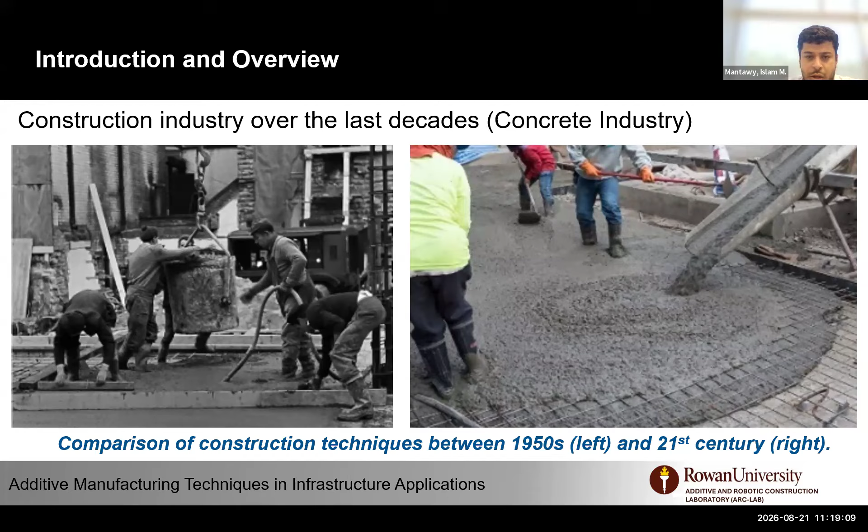We are almost 50-50 between steel and concrete at this stage. But in the future, if you are interested, we can schedule another presentation on the steel side of additive manufacturing for infrastructure.

So, background quickly here: if you check ISO ASTM 52900, you will find the classification of all additive manufacturing techniques regardless of materials. So you have sheet lamination, which is basically metal, material extrusion which is concrete, metal, or polymer, binder jetting which is also suitable for concrete, metal, and polymer, material jetting mainly for polymers, powder bed fusion suitable for both metal and polymers with different techniques. On the right side, you can see direct metal laser sintering and others.

Vat photopolymerization for polymers and directed energy deposition for metals. Our lab focuses on concrete extrusion and direct metal laser sintering, and we're exploring other techniques too.

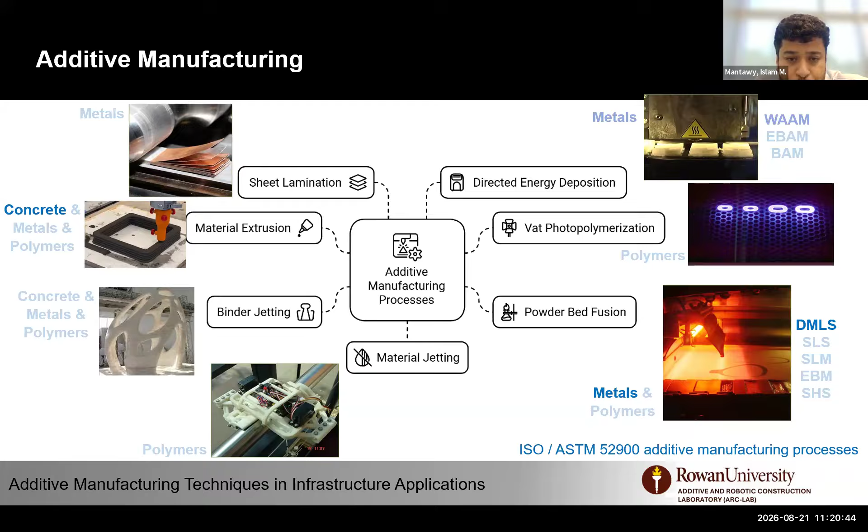The advantages of additive manufacturing in general are theoretically a reduction in labor needs, enhanced labor skill set, saving time, and reduction of material wastage through structural or topological optimization, broadened design creativity and problem solvability, potential reduction in carbon footprint, and on-demand manufacturing, which is a very interesting benefit.

For example, you could print on demand to replace a structural component instead of keeping them in stock, creating a more competitive economy and businesses.

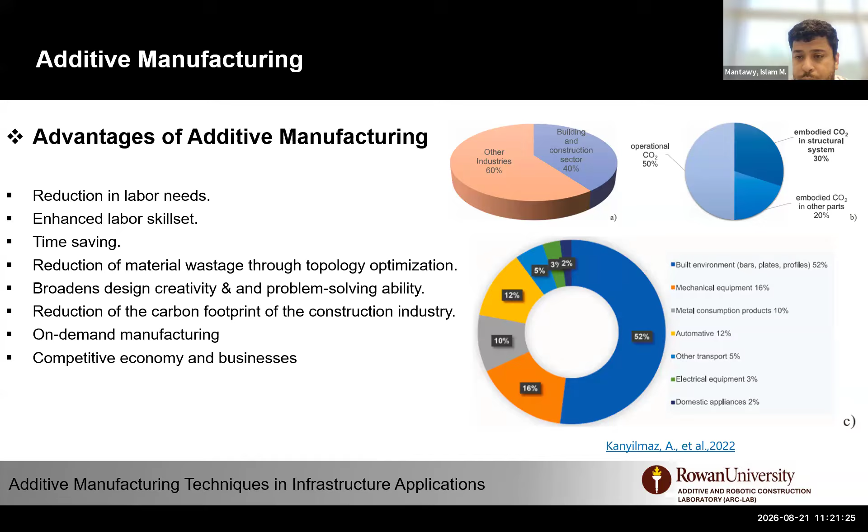At our lab, we categorize construction now into three categories. There's conventional construction, where we all know about forming, placing reinforcement, and casting. Most of the 3D printing techniques we see right now involve printing part of the structure, so printing formwork, waiting until curing, placing reinforcement, and casting. We call that hybrid construction because you're still casting.

Our goal at Rowan is to create an additive construction technique where the reinforcement is an integral part of the process, or to create a structure that is predominantly in compression with some redundancy.

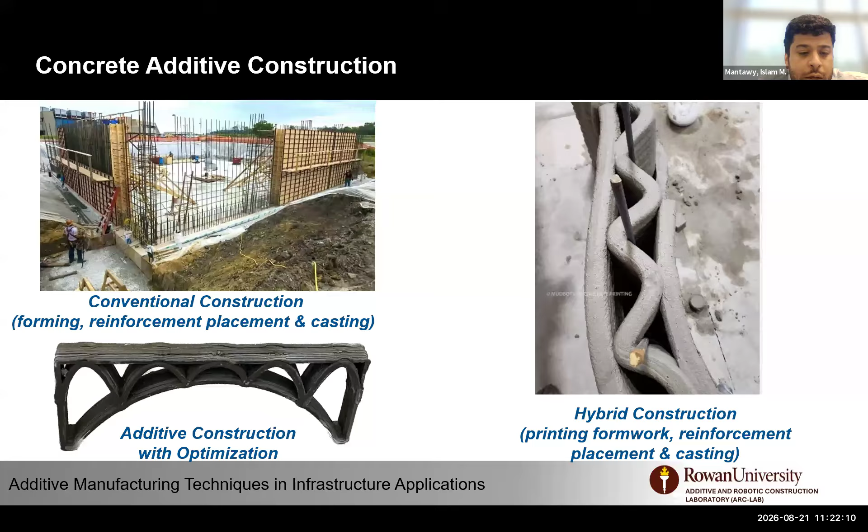Just to introduce concrete additive construction in general, historically concrete requires slump and vibration to fill formwork and encapsulate reinforcement. However, in concrete 3D printing, we actually change the material, and especially the rheology of the material is altered, so that allows us to print layer by layer. That actually induces challenges, especially in the material itself or the structure as a whole.

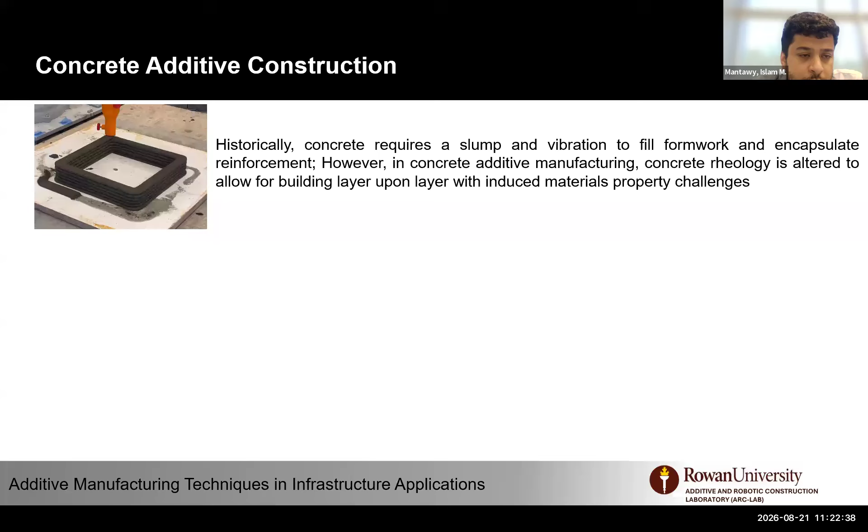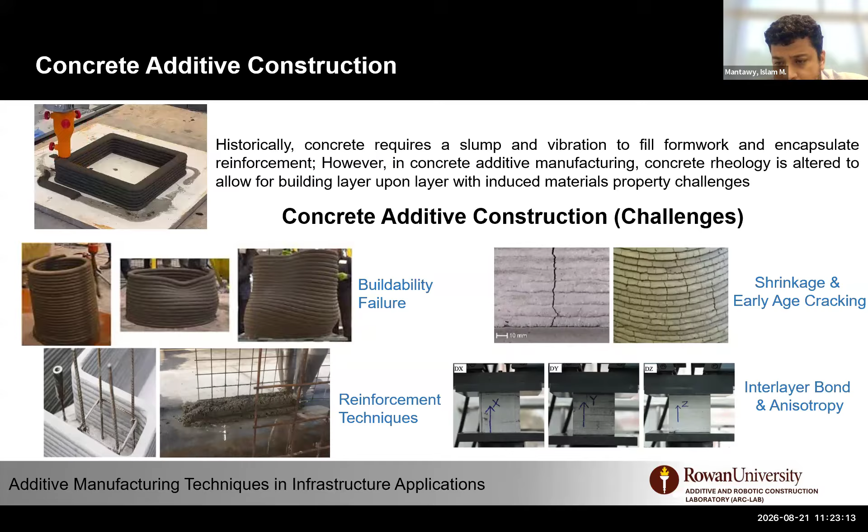Those challenges include during-print buildability failures because of not tuning the material rheology, or early age shrinkage and cracking, because instead of having cast concrete encapsulated in formwork, now the entire structure is exposed to the environment and elements. One big challenge is reinforcement techniques, or how to integrate reinforcement. And for sure, as with any 3D printing technique, you will have anisotropic behavior and interlayer bond problems.

So, introduction to our lab. Our lab has 5 students, 4 PhD students working in the lab. Mainly 4 of them work on concrete and 1 on steel. Our lab's objective spans concrete additive construction and metal additive manufacturing, both having optimization techniques and hazard systems.

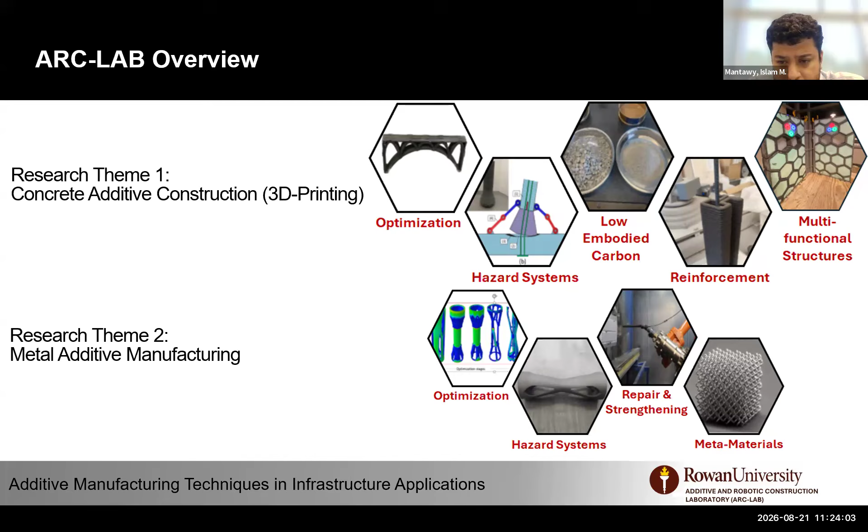In concrete, we talk about locally sourced material and low carbon footprint, novel reinforcement techniques, and also multi-hazard functional structures. In metal, we think a lot about how to repair corroded or cracked steels using cold spray repair, and also using hazard protective systems. As I mentioned, I will not touch on metal additive manufacturing in this presentation, just to have a focus.

After that, we do what we call performance-based printing. So basically, after we initially develop the material, we go through extensive testing through the printer with so many different parameters of printing, extrusion rate, buildability, printing speed, etc., to evaluate the printability of the mixes. After that, we end up with a hardened structure that we test for flexion, compression, and others.

We also collaborate with a faculty here, Dr. Trias, using LiDAR scanning to capture the geometry of the structure, during and after printing, to compare the as-printed result versus the CAD model. When we fail in any of those, we go back and adjust our binder.

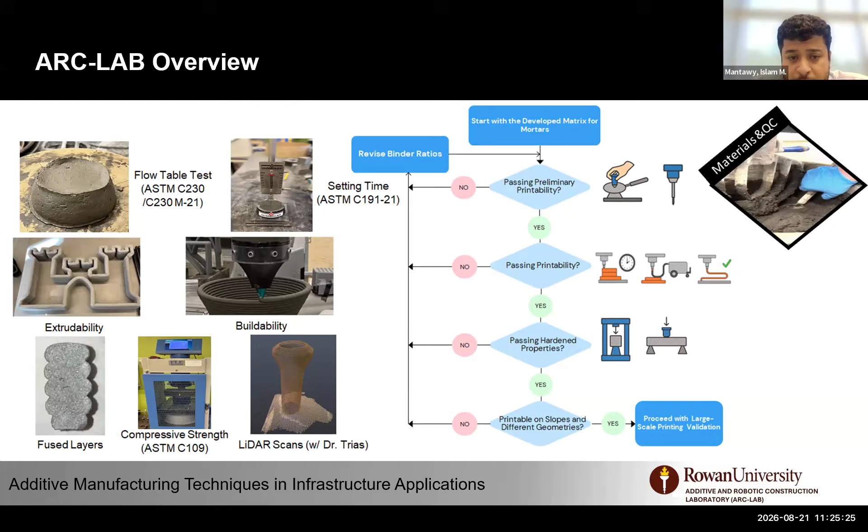But since 2023, we have different versions of those materials, so we are now in the phase of using those to build structures. Our lab at Rowan has the SCARA Elite Roadrunner, and this is a printer robotic system on a rail.

The rail is 20 feet long. The robotic arm has an extension of 7 feet, so it can print 7 feet around itself, and a height of 7 feet too. It can print 1 to 4 inches per second, and it has 360 degree rotation, so it can rotate around itself completely.

We have two systems: on the right side, what we call the closed system because it's a syringe tube, and on the left side, the open system from mixing to pumping to extrusion using the auger system that regulates the extrusion rates. We can print now from 5mm nozzles up to 2-inch nozzles.

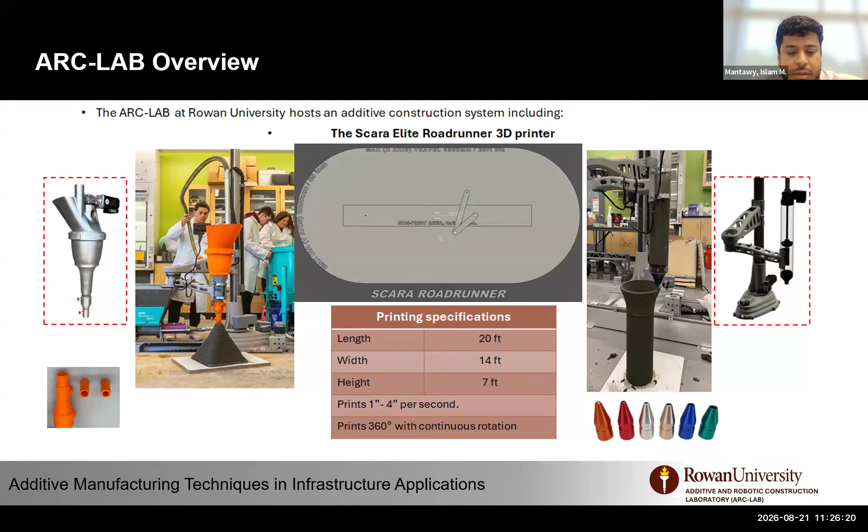Here is a comparison between the systems we have. On the left side, using the same material we developed at Rowan, with locally sourced material, 20 miles from the university, all the ingredients. You can see the same mix printed with 3 different systems.

One is a tube that involves more of a piston-type extrusion, the middle one is the auger system printing a much bigger cylinder, and the right side is printing out of the pumping system we have directly to the nozzle. You can also notice someone moving around with a LiDAR to scan the structure as we are building it, to capture the deformations.

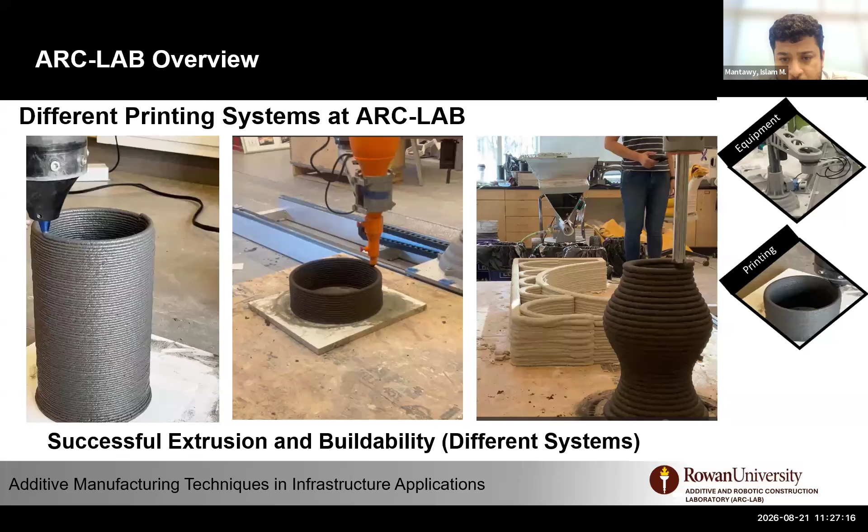So the same mix was used with 3 different systems and passed almost all the printability requirements. We also take great pride in the quality of our prints. Some of our mixes also include fibers, so we have fibrous mixes for 3D printed concrete.

Our mixes range without fiber around 10 KSI as cast. We're going to drop that a little bit once it's printed, dropped by 20%, so around 7 to 8 KSI without fiber. With fiber, you can increase 2 to 3 KSI, and it actually has benefit in the flexure capacities too.

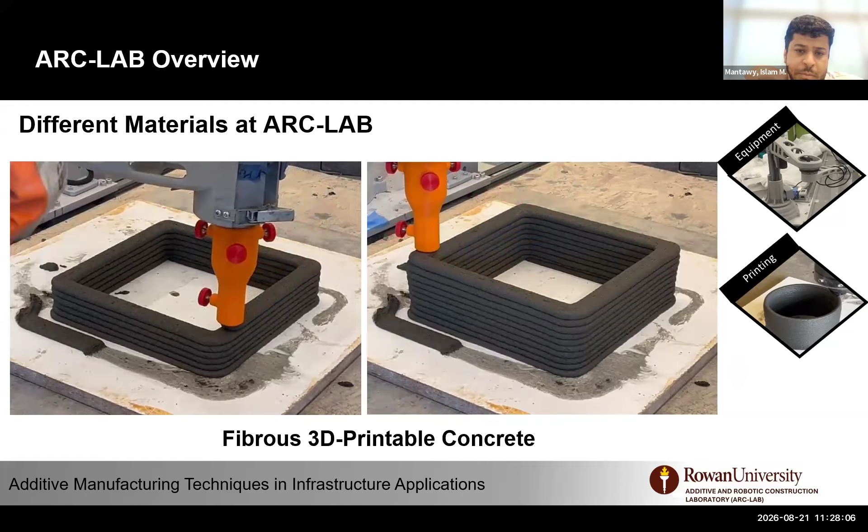So here is another type of mix that includes steel fibers. In this case, we are able to print fibers from 4.5mm, 6mm, and 12mm, 12.7mm, with the fiber actually as an integral part of the mix.

We also print on slopes. I just wanted to have a disclaimer here: we don't use any accelerant in our mixes, so all our mixes are fresh. If you hit the mix after printing, it will collapse.

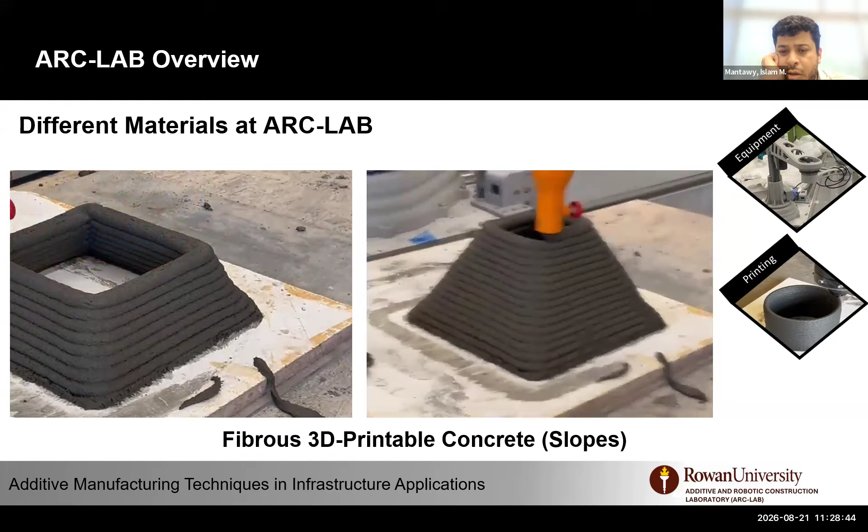So you can see here, we print this full pyramid without support using the fibrous mix we have, and also we printed without fibers. The idea here is, can we unleash the potential of 3D printing by printing on such slopes? This slope is 26 degrees from the vertical position, and we're able to complete the entire structure printed. We also took it one further step and printed a flare type structure, or flared pier. So with this same fibrous mix, we're able to print any slope.

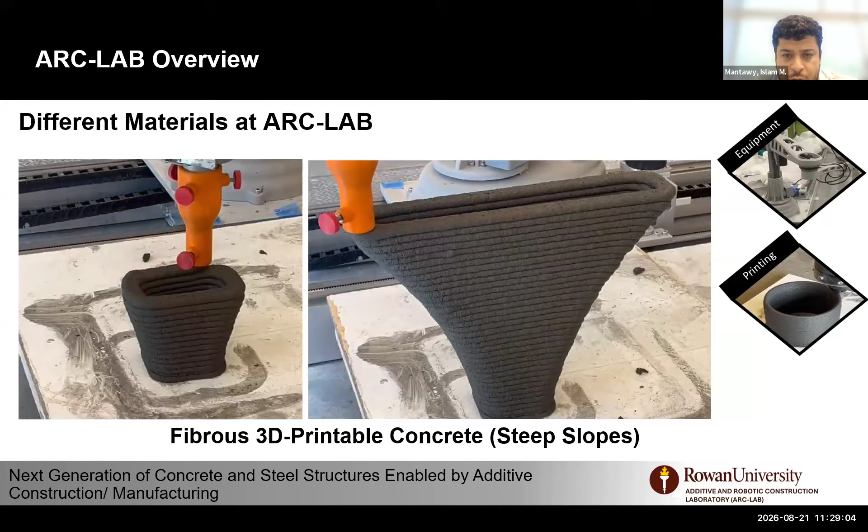We take that to what we call stress testing, so we print until failure on the slope. As I mentioned, this is without any accelerant in the mix, and it was failing here by geometry rather than by the material. As you can see, partial collapse on the left side of this pier, and this was around 65 degree slope from the vertical position.

We were able to identify that without fiber, we can achieve a 45 degree slope. With fiber, we can actually extend that to a 65 degree slope.

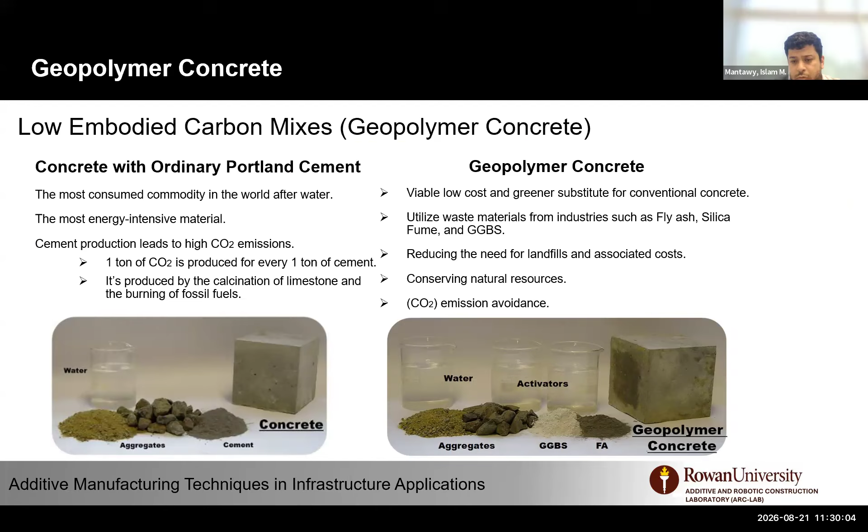We also work on geopolymer concrete. I'm pretty sure you're familiar with geopolymer concrete, that replaces cement with byproducts from different industries like fly ash, silica fume, slag, and uses chemical activators to create the binder. So we also work on that area, and it's a very challenging material. It's very flowable, but it has transient change in rheology, so we rely on those changes to start printing, and we're able to print different types. Later on, in project 3, I will show you we use that for 3D printing underwater.

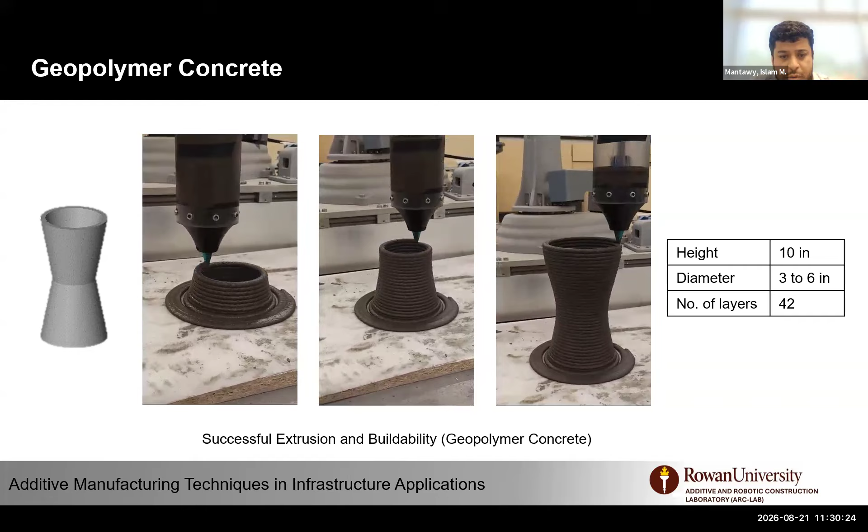So this is concluding the introduction of the lab. I'm going to start talking about the first project, which is how to use this material to develop a structural component.

Topology optimization is a way to optimize, a method to optimize using an algorithmic model, to basically subtract material where it's a low stress region and lay out material where it's needed, given a set of load conditions and constraints.

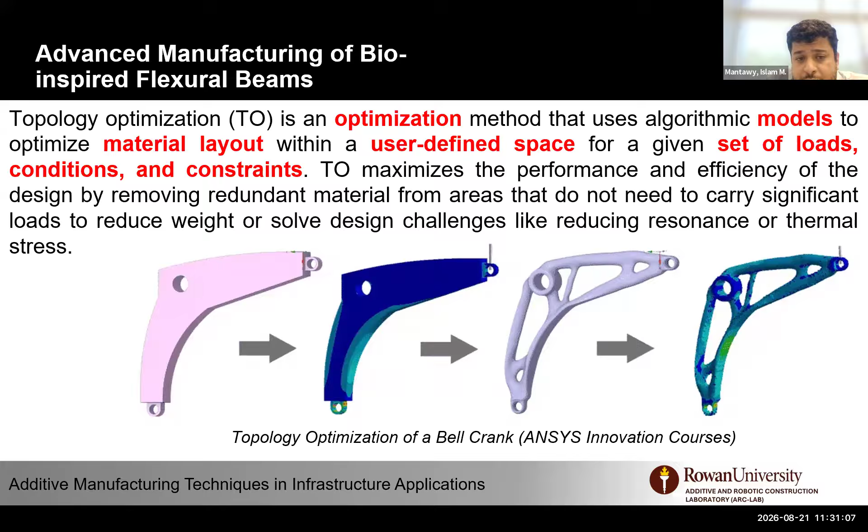It's very famous in homogeneous materials like steel. As you can see here, you can actually achieve the same performance as the right side from the left side by removing material from the low stress region. It has been investigated in both 3D printed and non-3D printed applications to create lighter structures. You can see on the bottom of the screen a 3D printed segmental post-tension bridge in Ghent, Belgium, where they 3D print those elements and connect them together and post-tension them. The analysis here involves topology optimization.

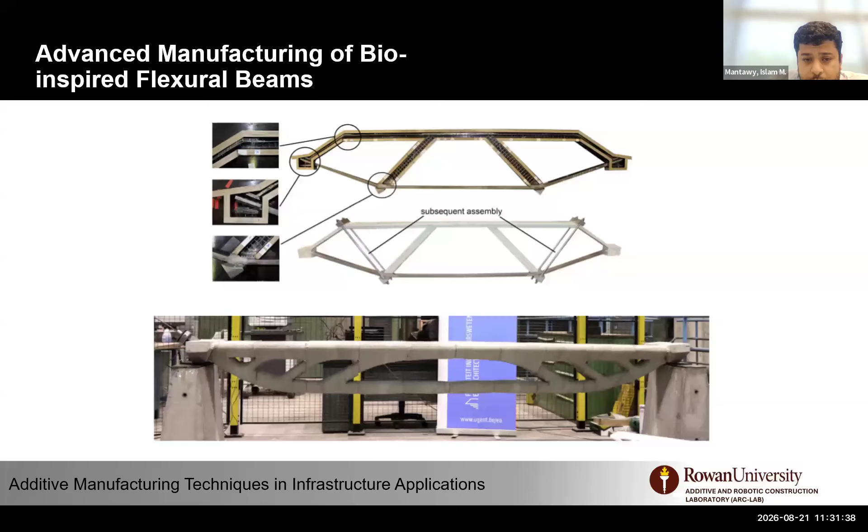So background here on general reinforcement for general casting of concrete. Usually the way we have reinforcement in our beams we cast is governed by the formwork. So basically we moved from bent bars to straight bars to make construction easier, instead of having the shear reinforcement in a direction where it's actually resisting the principal tension. We're actually using vertical stirrups, also governed by constructability.

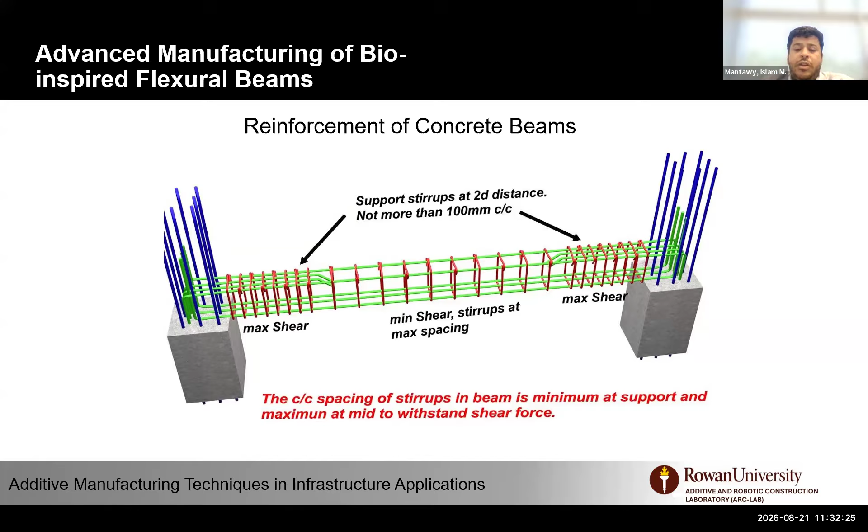So our goal here is, since our current technique is governed by the way of construction, which is formwork, can we step back a little bit and rethink the reinforcement technique for 3D printed structures? We came up with a concept really from nature, from how bees build their honeycombs. Basically, in a structural analysis of any beam, you will have tension trajectories and compression trajectory lines, and we come up with a hybrid technique where 3D printing of those cellular units or lattice structures, in the process, is able to include reinforcement. For example, here we use flexible cable reinforcement.

The idea here is that using the stress trajectory, we can fill the cells selectively using a flowable material. The difference between us and the rest is we immediately fill it with the same system, a 3D printing system, by changing the rheology of the material.

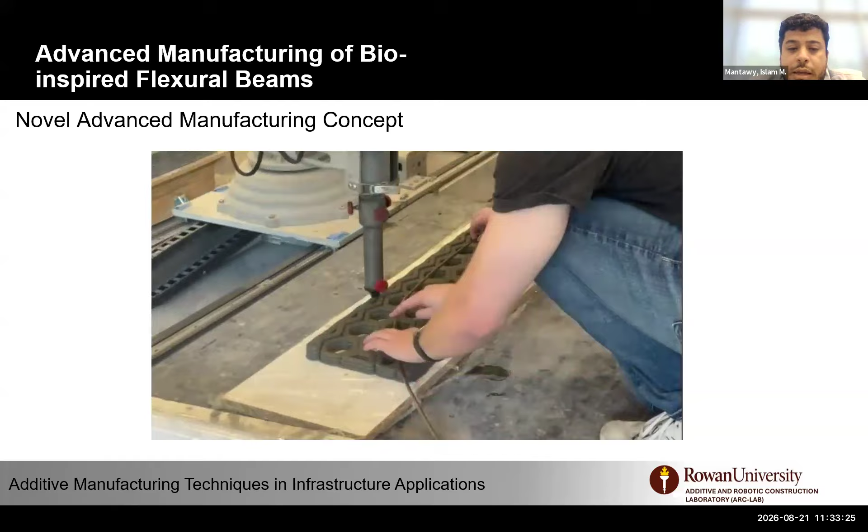This is just a schematic here. You can see we're printing a 3 feet long beam, and manually the student is placing the cable, tracing the tension line, and continuing the printing process. Right after printing, we change the rheology of the material to make it flowable and selectively fill as needed. We have to fill it around the reinforcement to protect from corrosion at the compression line and at shear areas.

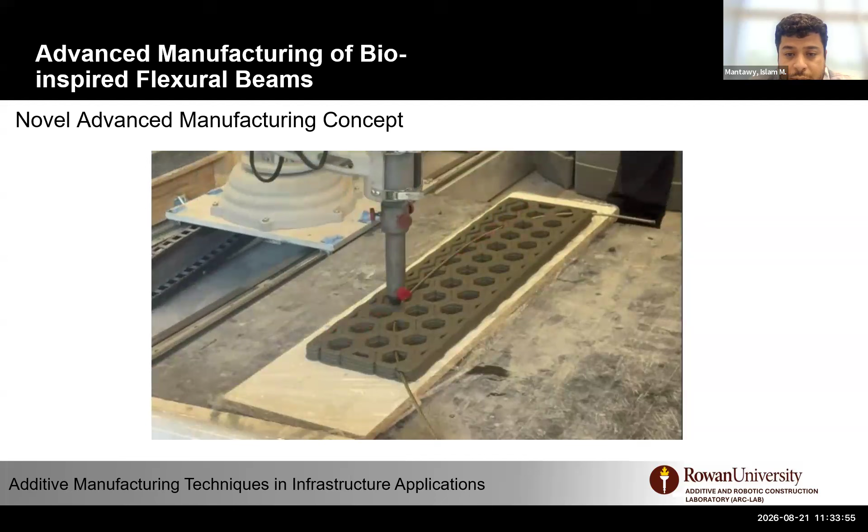In a larger, bigger beam, you get more benefit from this technology. However, in a smaller one, we may have just a few cells that are open, low stress regions. As you can see here, we start layer by layer and incorporate reinforcement, and until we finish, we can also use bent bar and straight bar. I'll explain that in a minute.

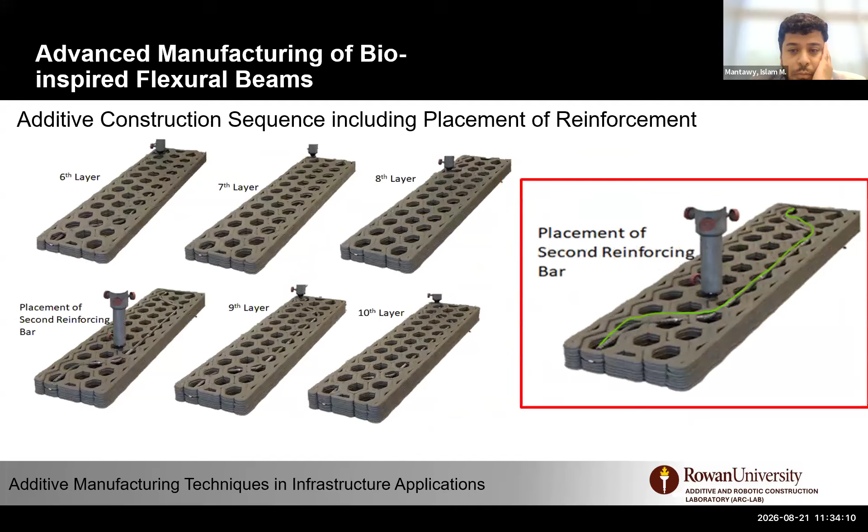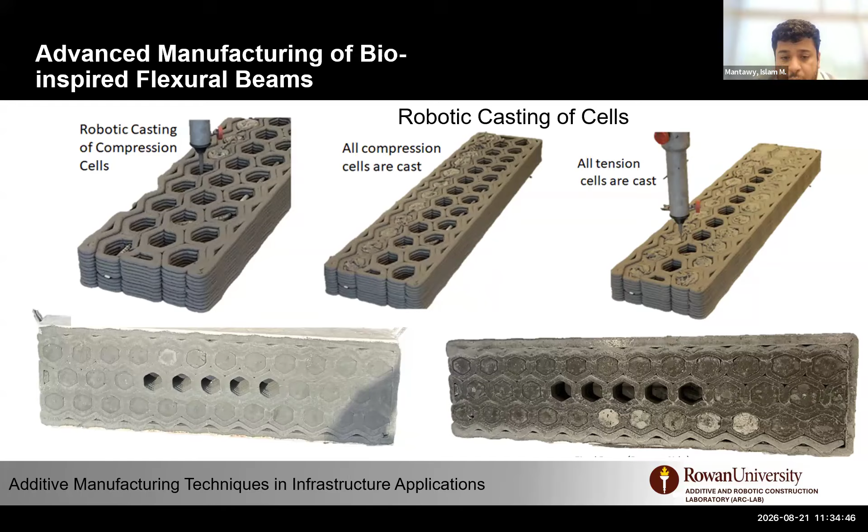The idea is to start filling those cavities immediately after finishing printing. The caveat here is that once we print and cast closer in time, we were surprised that they fuse really nicely, with no cold joints. I actually have one sample here with me that shows clearly the material fused nicely. For the 5 cells you can see here, just because of the geometry, we have limited benefit of optimization, but in larger elements you can see the benefits.

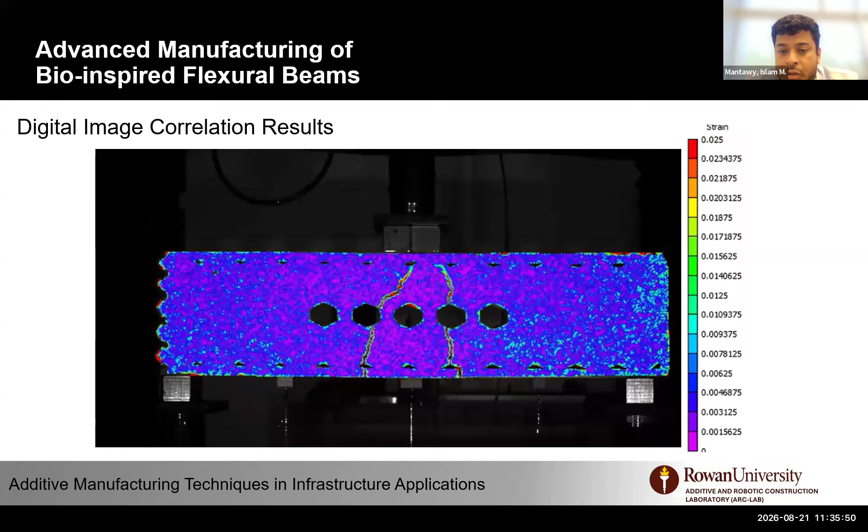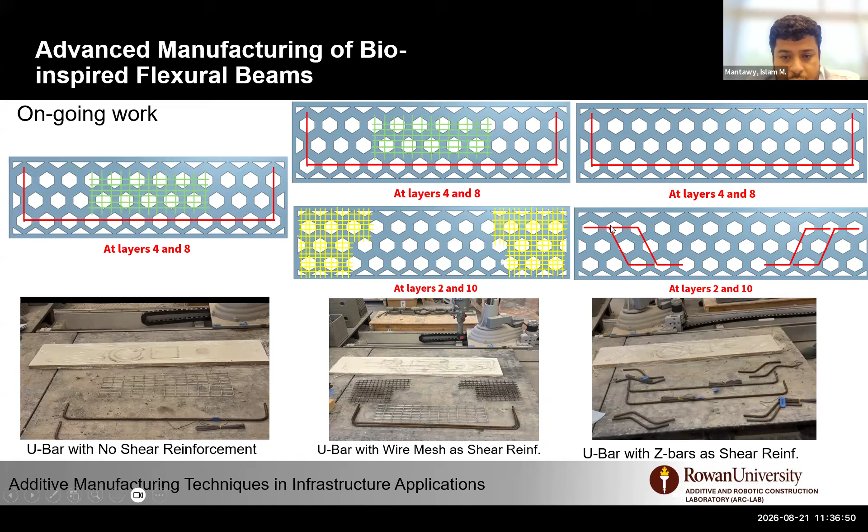So as you can see here, one beam without shear reinforcement on the left side, and two shear reinforcement strategies. Here is the process of the first beam, and right after printing and casting, on the left side, the shear capacity of this beam was around 13.5 kips, with a nice failure combining both shear and flexure. The middle one is dominantly shear, but it extends because of the load.

It was 3-point loading. The second one had shear reinforcement, which was able to suppress shear cracks using the welded wire mesh, and we shifted from shear failure to flexure cracks and flexure-shear cracks.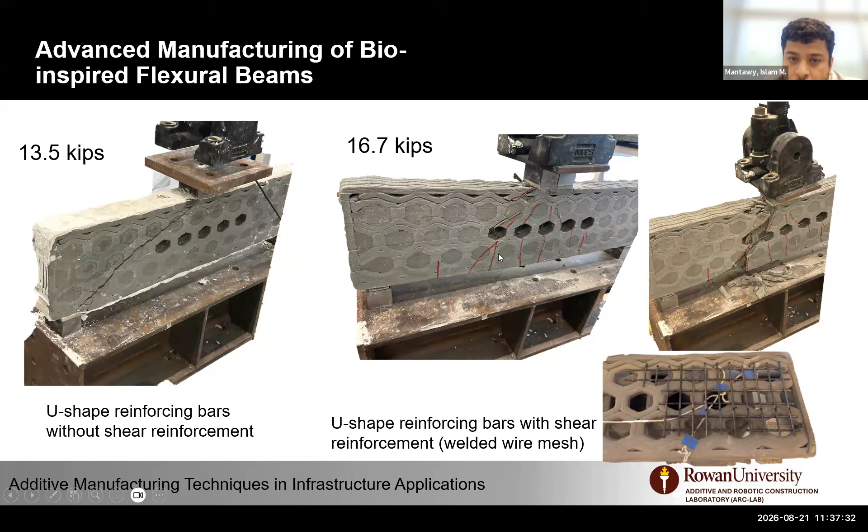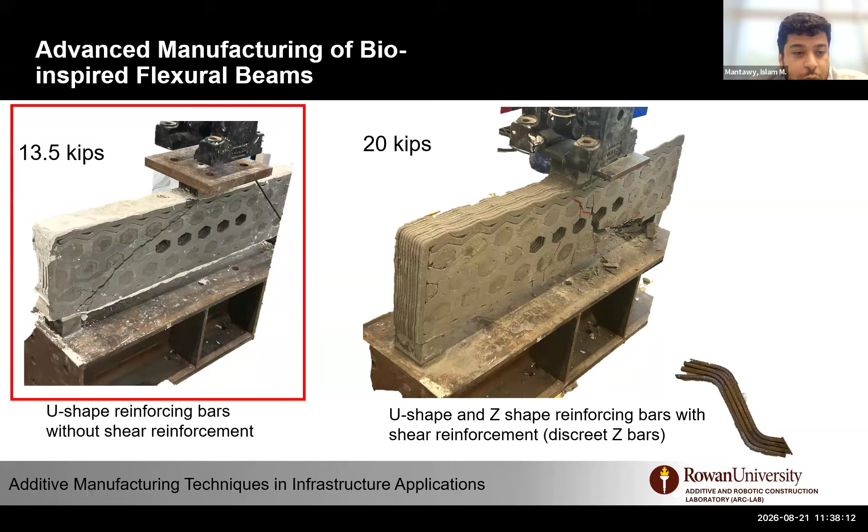And the last one is using the Z-bar, also has the same conclusion of reinforcing those ends from shear failure and shifting the failure toward the middle of the beam. A lot to be done to optimize and also make sure that those openings have some flexibility, rigidity, and ductility, so that we can reduce crack width as we move forward. But this is more of an approach that I tell my students - don't think conventionally when you do 3D printing. We will not be able to put stirrups in this case.

The second project here is related to another idea we have using this technology for seismic regions, developing bridge columns that can resist seismic loads.

So I'm pretty sure you're familiar with this resilience diagram. On the left side, you can see under a conventional element that suffers functionality loss and needs time for repair. However, new seismic systems always try to reduce functionality loss and downtime to enable functionality and rapid recovery.

As part of my PhD at the University of Nevada, Reno, I was part of a team from University of Washington and University of Nevada, Reno to test rocking columns for seismic zones. These boast a pretension column with a connection to the foundation using wet socket connection, and a cap using reduced section and hybrid bar type of connection with grouts, having pretension, unbonded, and energy dissipation through unbonded bars and the interfaces. The idea is simple: instead of making the beam or column rigid and inducing flexure behavior, what we're trying to do is allow it to rock back and forth.

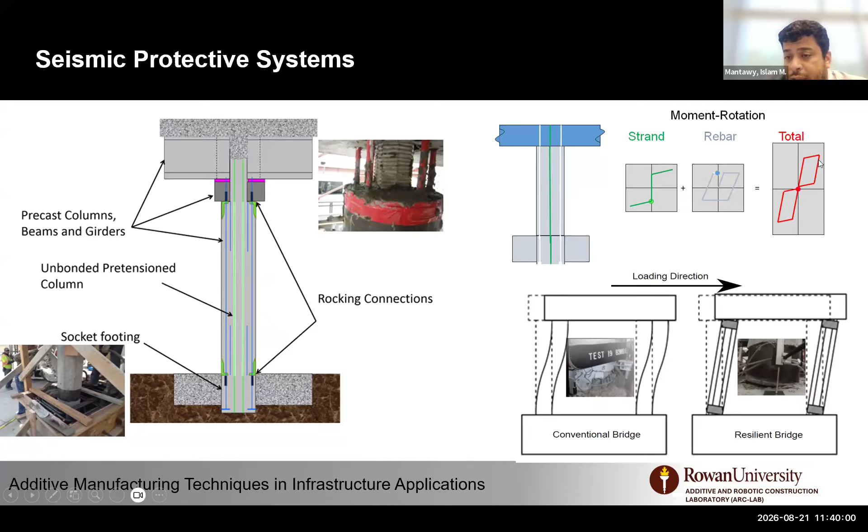And the pre-stressing will allow it to recenter. The confining tube at the end will confine concrete from spalling, and the rebar inside will actually yield and dissipate energy. So you can combine the moment-rotational response from strand and rebar and achieve this nice flag shape that dissipates energy and self-centers the column back.

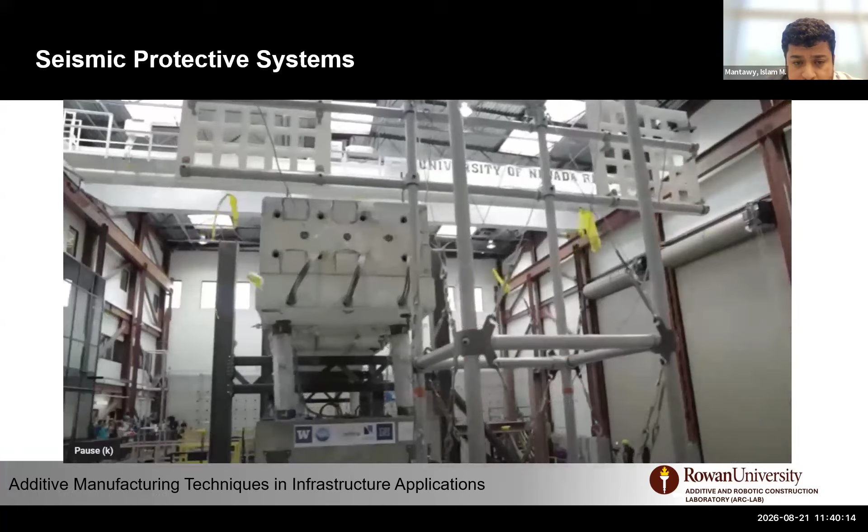So here's me, like 12 years ago, at University of Nevada, Reno, testing this in a large-scale test - 70 feet long bridge in the lab on 3 shake tables. And as you can see, a lot of deformation, sways. However, everything self-centered nicely to the original position without permanent collapse.

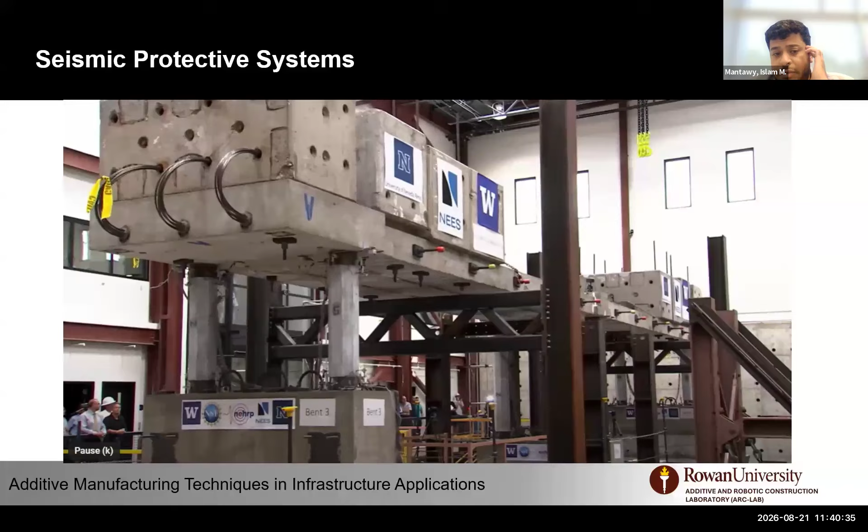A few challenges we have: after we finish the testing, everything looks nice, and the inspector will go there and see minimal damage, but the main damage was actually the fractured reinforcement that acts as the damper, like an energy dissipative device. So we did a lot of work to identify the damages, but most of the DOTs actually criticized the system, saying that we would have no way to repair those columns.

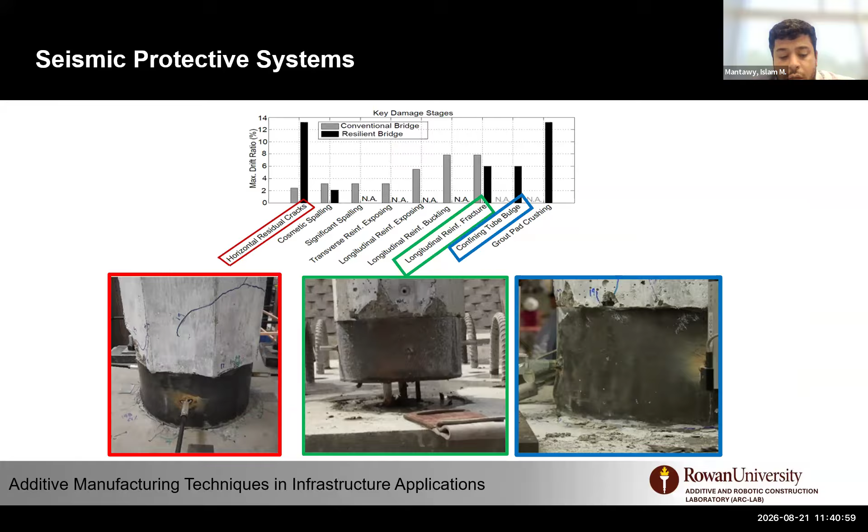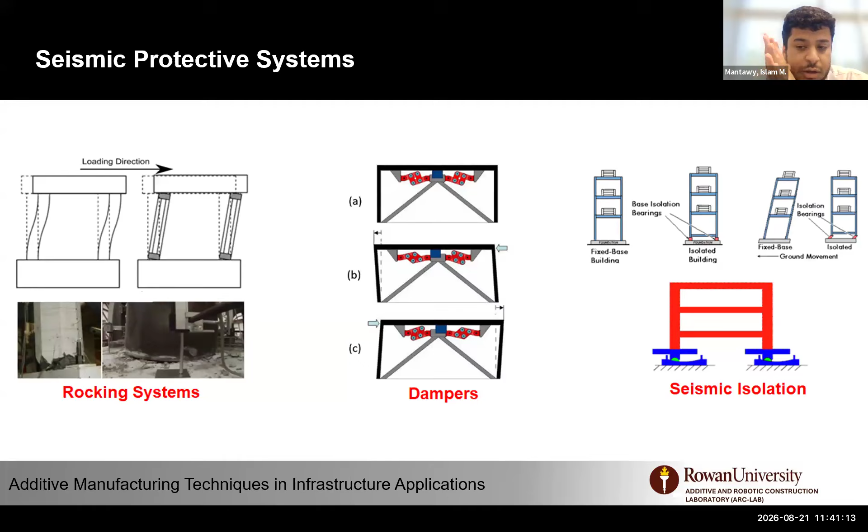So we thought about integrating other ideas when I joined Rowan, to enhance the system, integrating inspiration from dampers, seismic isolation using those concave shapes, and also from nature, where we have this ball-socket connection in our hip joints and shoulder joints having the cartilage.

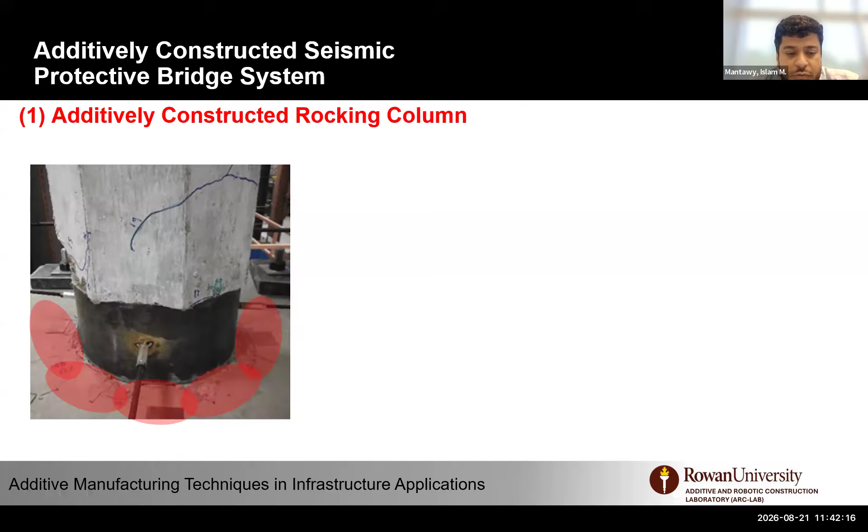So from the old system to the new system, you can see a lot of cracking and partial spalling in the foundation that is actually prohibited by code, because it has to remain elastic or damage-free. That is mainly because of concentration of the forces as it rocks, due to the cylindrical geometry.

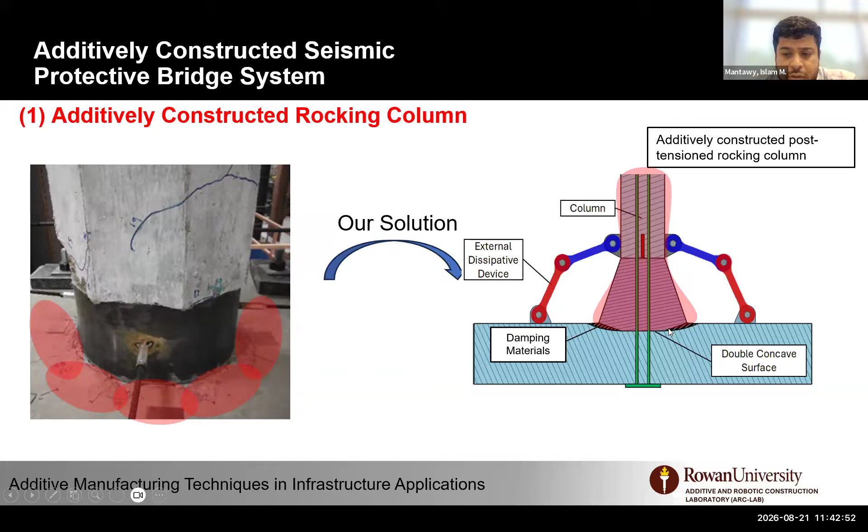So what we have schematically developed here is a column that has post-tension, will be 3D printed, and post-tensioned to the foundation, and has concave surfaces that allow us to put material that could act as a damper and also as an external damping system. That allows us, as it rocks, instead of having one concentration of force, to have a surface distribution of force.

So here, as you can see, as it rocks, it tips on one joint at one point. However, in our system, it would rather have a surface, and this material in between has to be a kind of shape memory material using TPUs and other materials that can damp the forces.

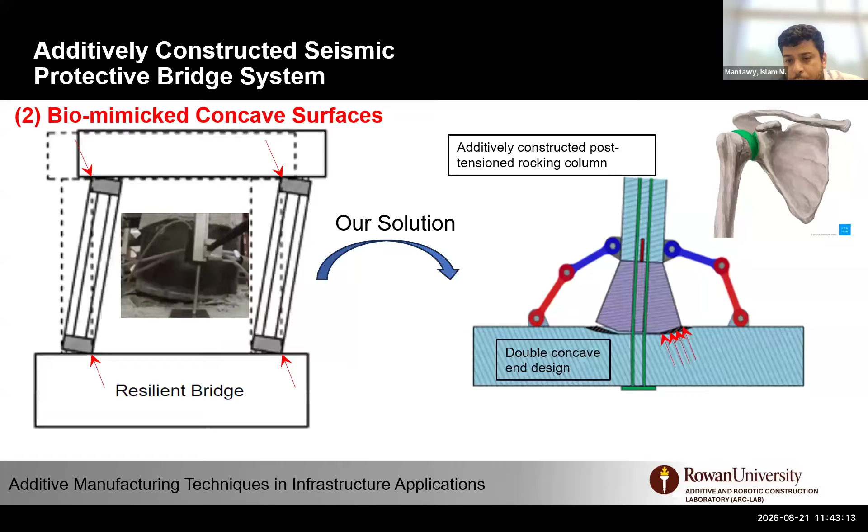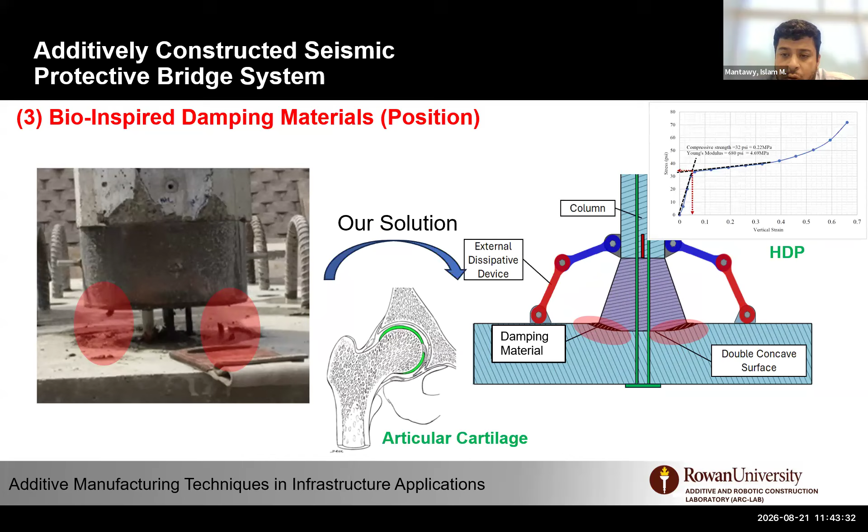The other one is having internal dissipation from rebar yielding. We move that to the material inside this cavity to allow it to deform and dissipate energy using either HDPE or TPUs and other materials, or an external element that activates by resisting rotational friction rather than yielding and dissipating or buckling.

We did that testing on the small-scale device, and we demonstrated at Lehigh University that we are able to dissipate energy using rotational friction as external elements. So this is what we call the integrated system that we propose.

As of now, we can also take out the external element and tune those cavities and material to damp the desired material. By doing so, we also shifted the system to be seismic isolated, because we're reducing the demand by getting a bit more flexible. So the acceleration will drop, and therefore the demand will be lesser.

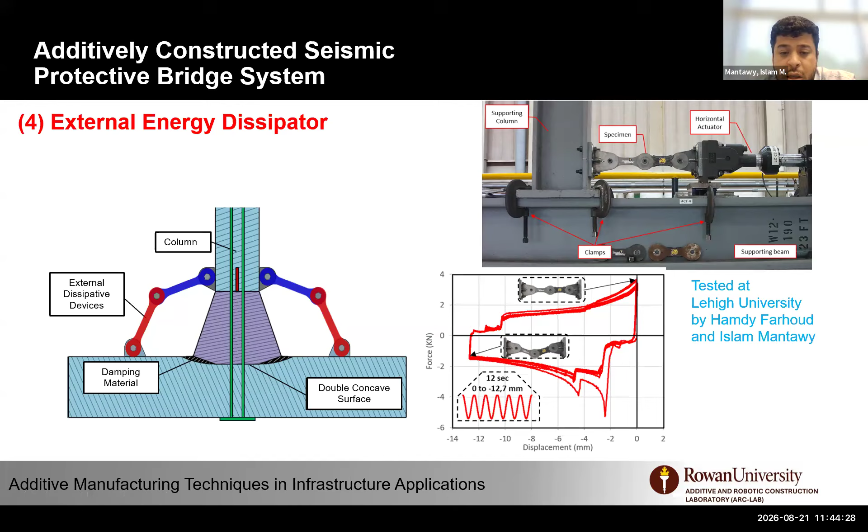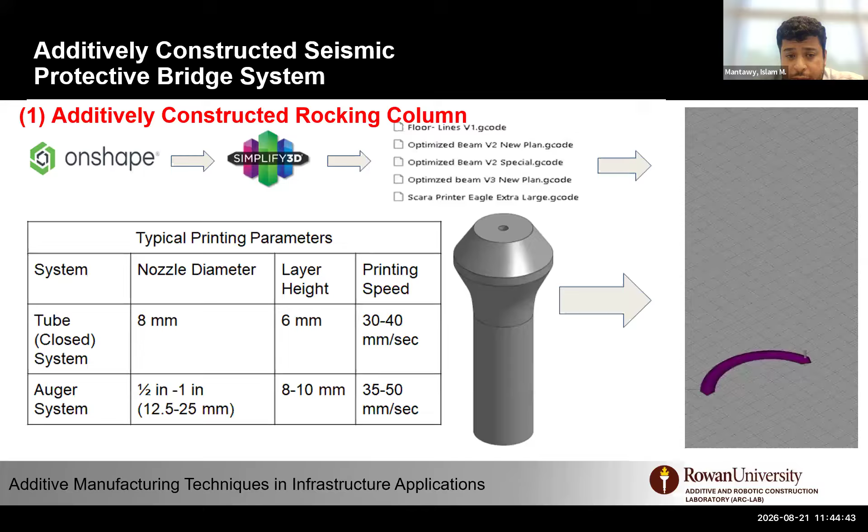We are in a phase of testing this idea at Lehigh University in the fall. We did all the printing requirements, and we are now in the final stage of construction of those columns. So basically, going back to 3D printing, students worked on very different designs.

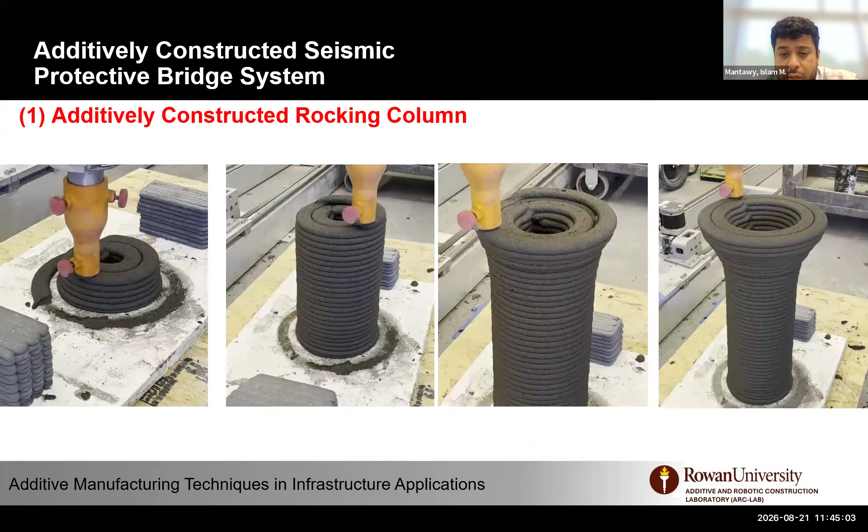As you can see here, the printing of one of the columns leverages our material's ability to create complex shapes, flaring in and out, with high quality and good adhesion between the layers. This is the end of the socket print. As you can see here, we have an opening in the middle for post-tensioning.

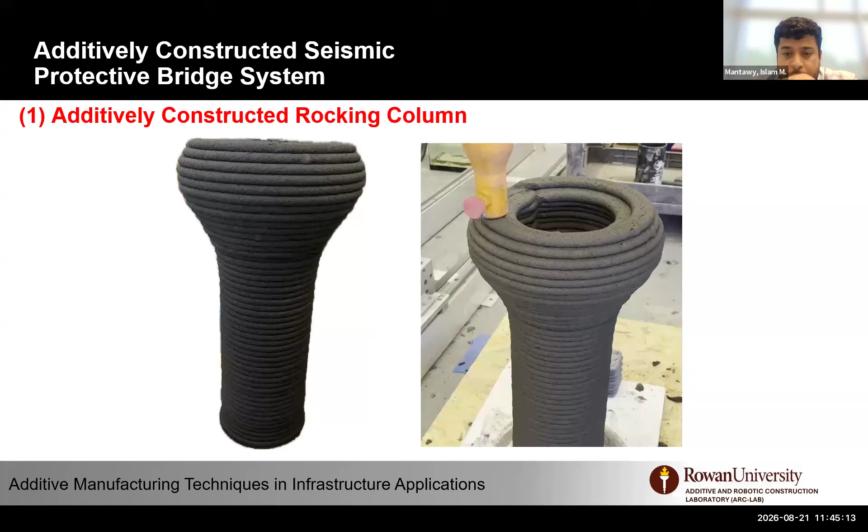For this column, we don't have reinforcement, but the idea, as I mentioned, is that as you isolate the structure, you have lesser demand. So really, we can test the material shear strength and rely on that to resist. However, I'm going to correct that in a minute.

The question would be: no reinforcement, no one would accept it. So go back to the column - the way we reinforce our bridge columns or general concrete columns is by having longitudinal bars and spirals. Or in post-tensioning, you will see a cavity or duct to do the post-tensioning or pre-tensioning.

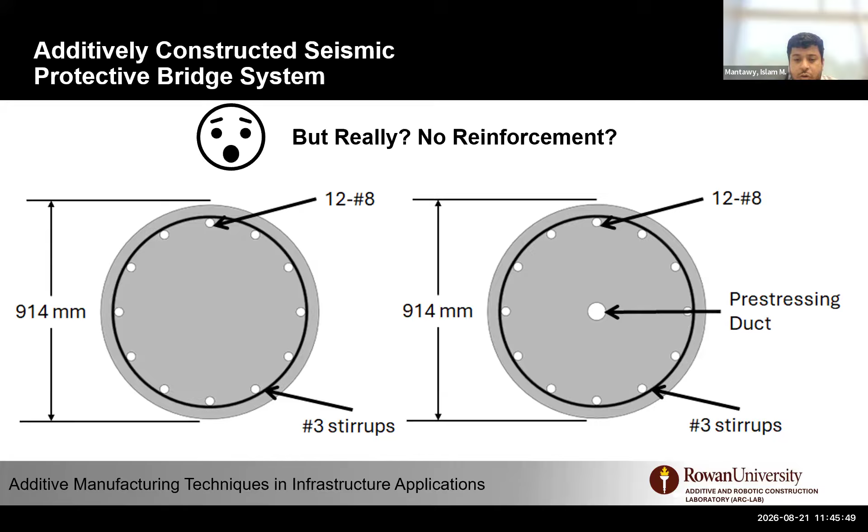So our goal here is to print the majority of the column, leaving channels or cavities for rebar to be bonded, leaving an opening for post-tensioning, and for the spiral, we actually try to use an external confinement technique.

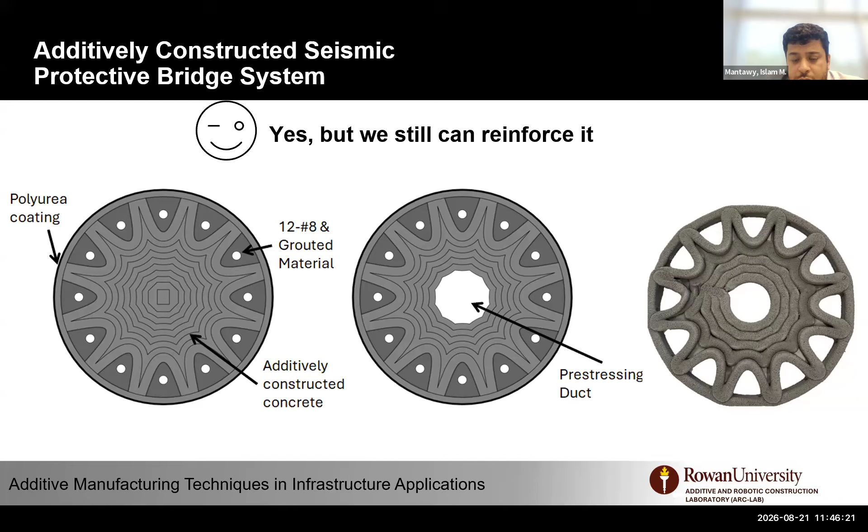I know Dr. Nani is well known for FRP and other work, so there can also be an option to wrap those columns with FRP. So the idea here is to print the majority of the column. Our column is just 6-inch diameter, so we iterate on the printing process and print the columns.

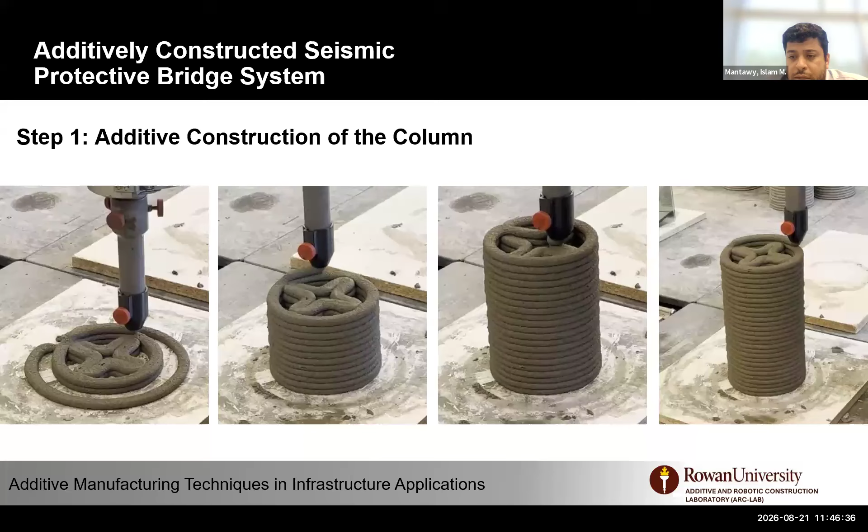We did stub columns to test the capacity of those columns. We also did integration of rebar and robotic casting of those cavities, and we used the polyurea material for confinement, which is good for impact, and also gives us a benefit for confinement as an external coating.

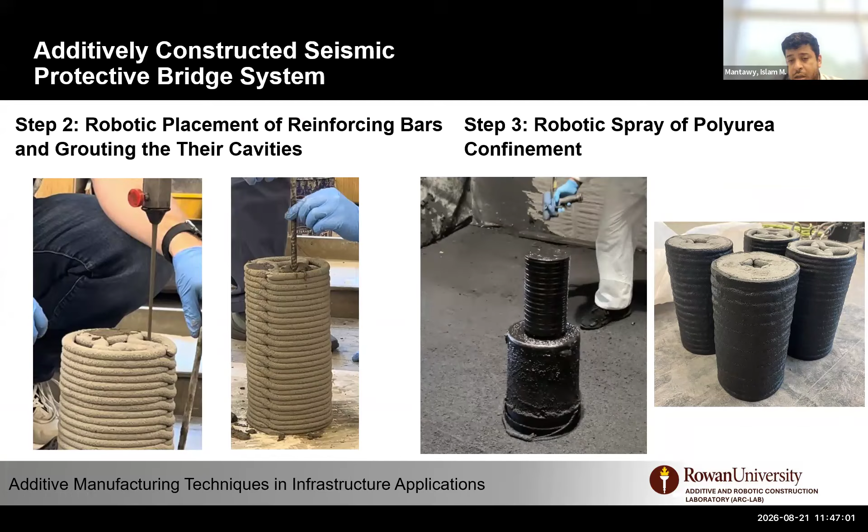So you can see here we have 4 columns. One we tested where we have only printed shell, printed and grouted, and rebar printed with spray overall. We tested all those columns at Lehigh University last winter, and we're able to see the mode of failure for each of them.

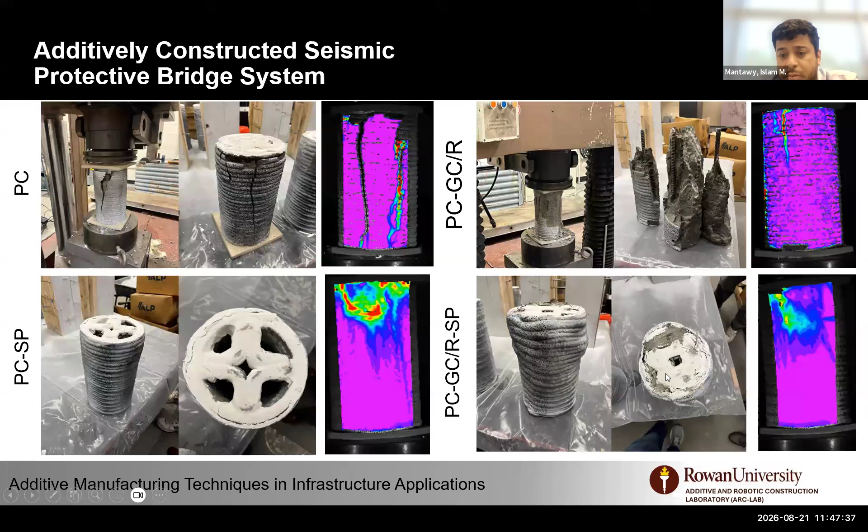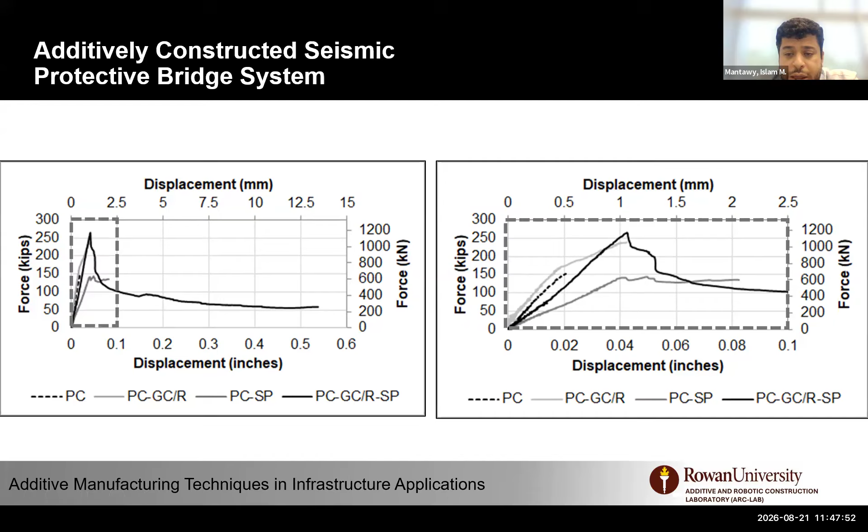As expected, the 3D printed alone had brittle failure, similarly to the reinforced one because it doesn't have confinement, while the ones with confinement were able to undergo post-peak ductility. Here are the results for those 4 different columns - you can see we increased the capacity as we add those components, either spray or the reinforcement, but also we get post-peak ductility.

The other project here, before we conclude the presentation, is related to underwater 3D printing. This was motivated before the DARPA project announced in 2024. We were actually doing work in this area, but the idea was how can we use water or other liquid to achieve more slopes as we print. However, now it has shifted to be a structural element.

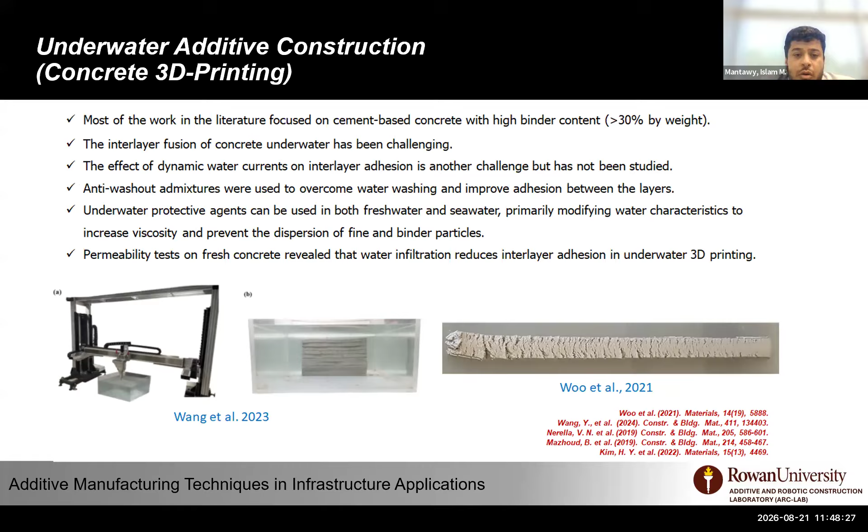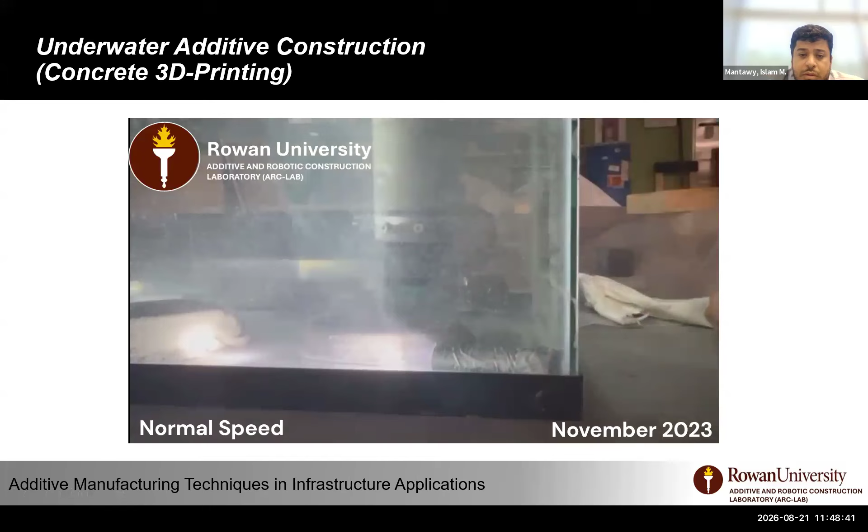So we did the first-ever underwater print in November or fall 2023. We printed our material underwater and out of water. I don't want to spend time here, but you can see clearly the washout of the material as we printed it.

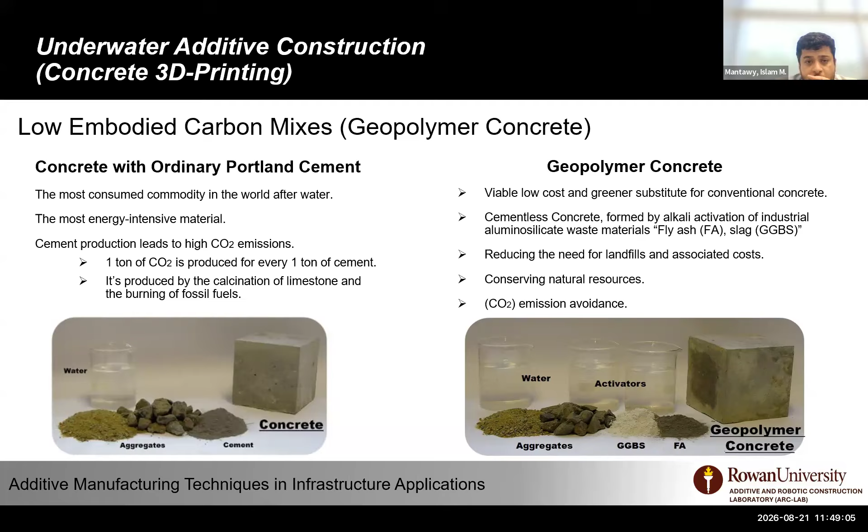During the DARPA competition, we did a lot of work to try to demonstrate the ability to do underwater printing. Since then, we made it a PhD project for Ali, and he took his geopolymer concrete and tried to re-engineer it for underwater 3D printing. We were not the winner of the DARPA competition, so we actually got some benefit of not being restricted by percentages or certain components.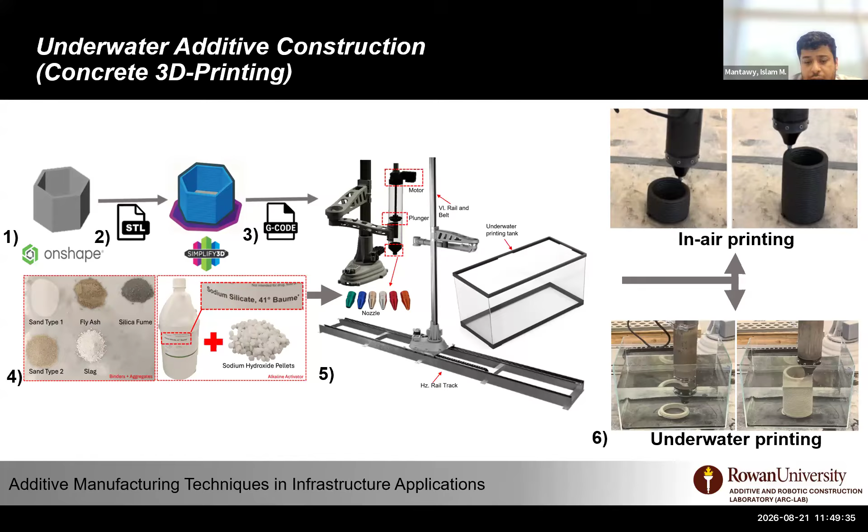Here's our mix, from mix 1 to mix 5, using slag, fly ash, silica fume, different gradations of sand, and a chemical activator on water. This is a process we developed for underwater printing. We get our water tank, fill it with water, and print inside. As mentioned earlier, the material was initially developed for in-air printing and modified for underwater printing.

As you can see here, the material is actually printed as a few cylinders underwater. I know it's not large scale - we are using the tube, but we are also trying to scale that up using the Auger system. You can see here we achieved almost 37 layers without noticeable washout.

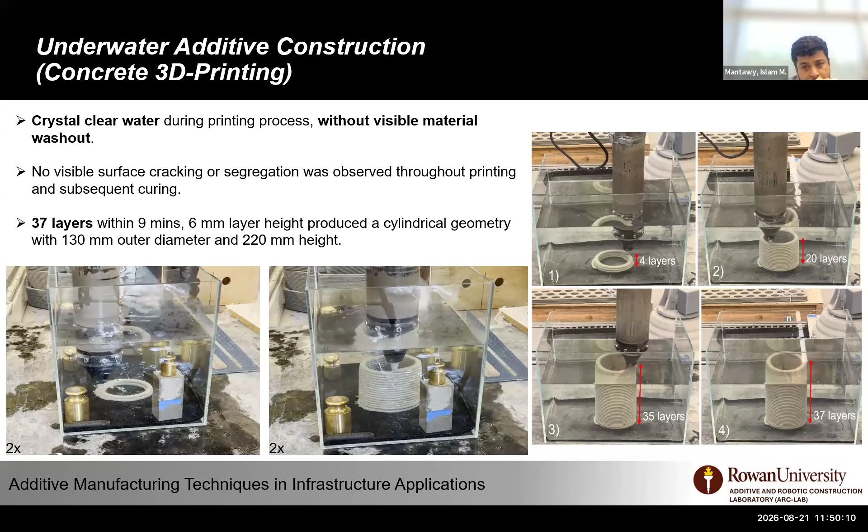However, we also took it a step further and tried to create flared structures in slopes. As you can see here, we printed the slope as well. We had some technical issues with the printer, so we have some deformation of the layers. But even with that deformation, the structure was able to withstand it, and we were able to print up to 44 layers with an 8 millimeter nozzle.

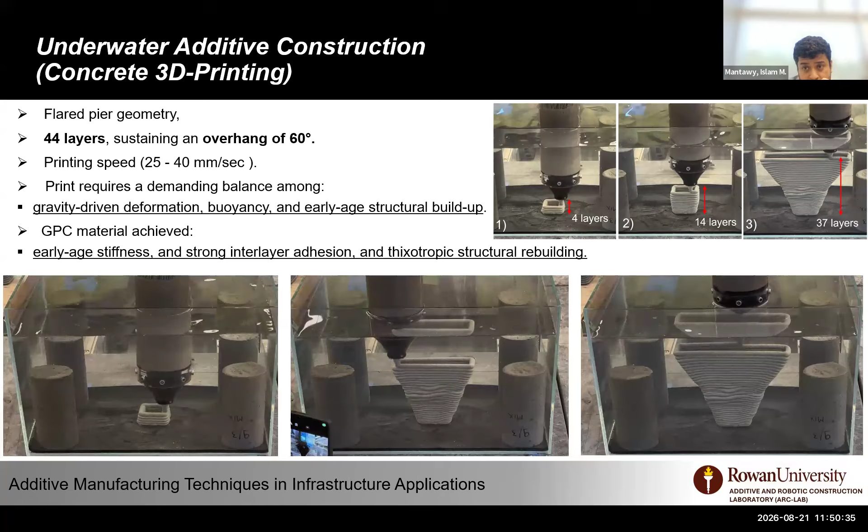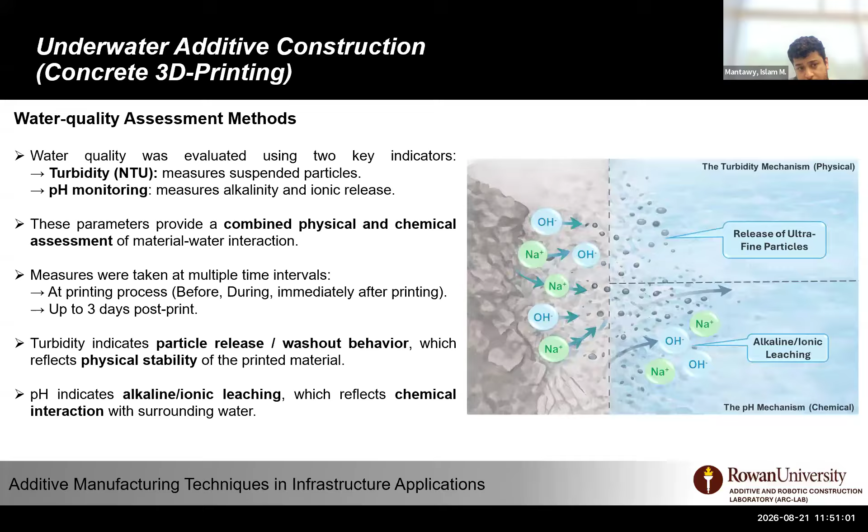One thing I mentioned is no noticeable washout - we also did work on water quality assessment using pH monitoring and turbidity testing, to test both chemical and physical washout, especially since we are using chemical activators. Basically, we'll take water samples from the tank before printing, mid-print, after print, and every 6 hours, 18 hours, every day for 3 days, and do turbidity testing to see the physical leaching of particles.

We also did pH testing - started with 7.58 for the tap water and it increased to 11.7 because of the alkalinity in the mix.

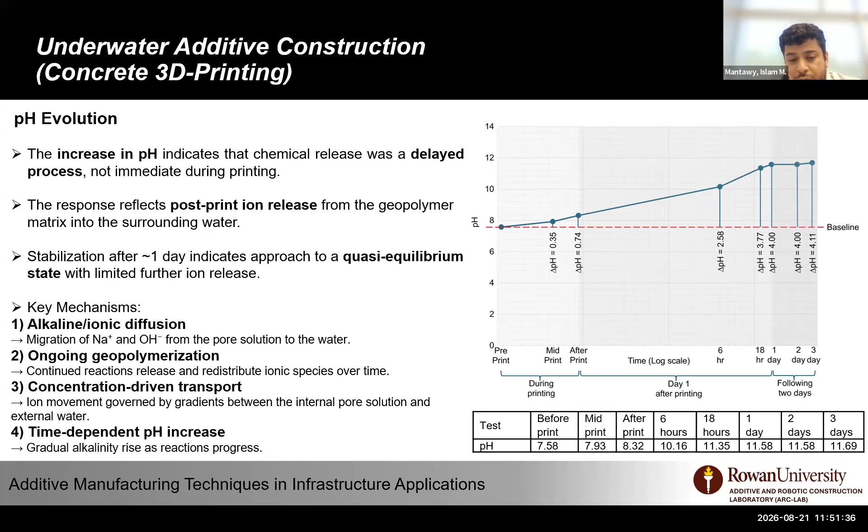We also did a lot of mechanical testing, compressive strength for both the cast version and the printed version of the material, and you can clearly see the decrease in strength when printing underwater.

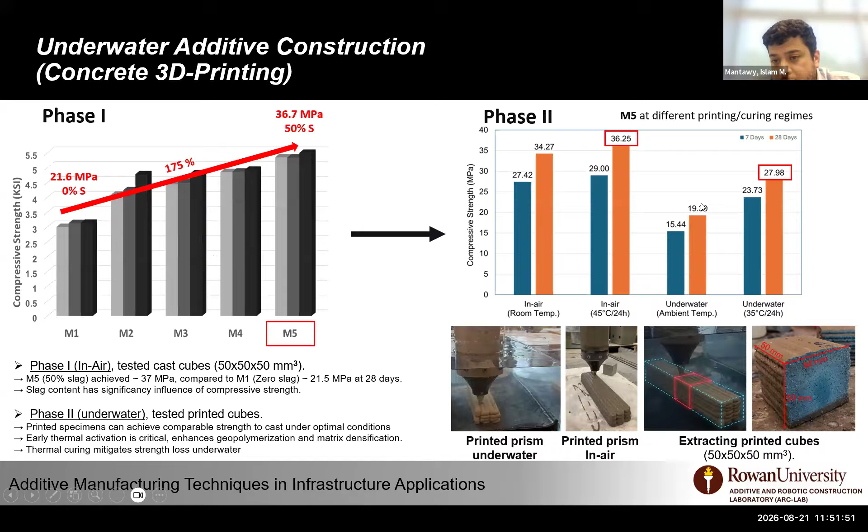The goal now is to expand that work for the PhD to include marine sand and other mined elements from the ocean, like sediments, and use seawater as part of the printing process. The idea is to reduce reliance on transportation of this material in the field.

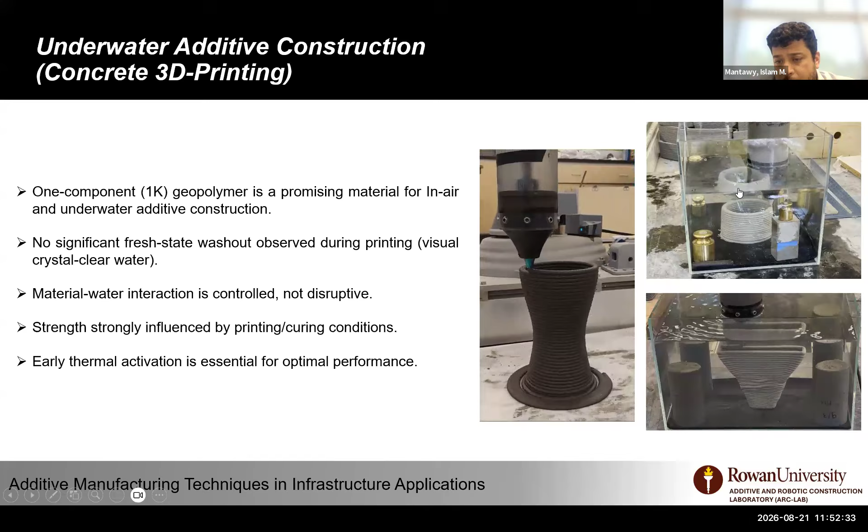We also have work still under submission and revisions - in fact, we have one paper already published in the Journal of Building Engineering. If you are interested to know more about this research, I'll be around.

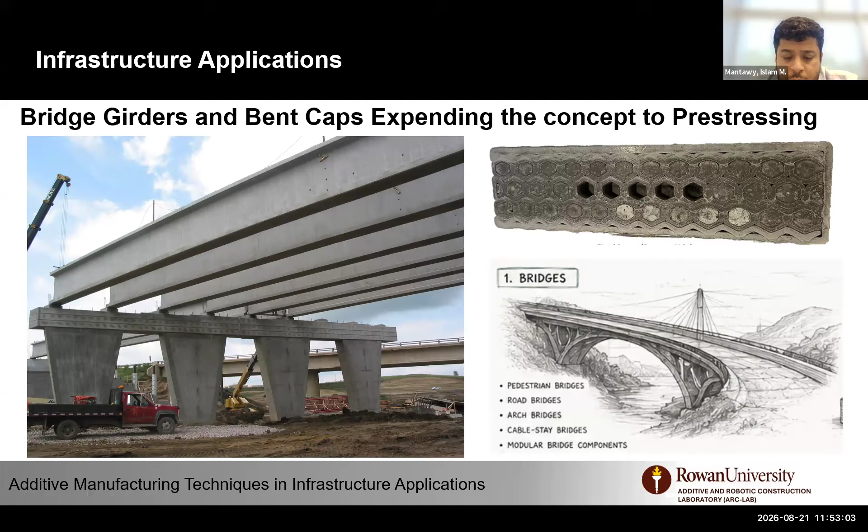So the last part is an open discussion of potential applications of 3D printing in infrastructure. We are still in the initial phase of this research for the bio-inspired beam. In the future, hopefully there will be integration of that in precast, and hopefully we're able to verify those beams and enhance the designs - that could have application for bridges, similar to what we have in bridge columns.

The idea now extends to arch bridges, tunnels, and underpasses. We did some work with undergrad students to get them excited about 3D printing - having them come up with different shapes based on existing, notable bridges that they can scale down themselves, model, and print.

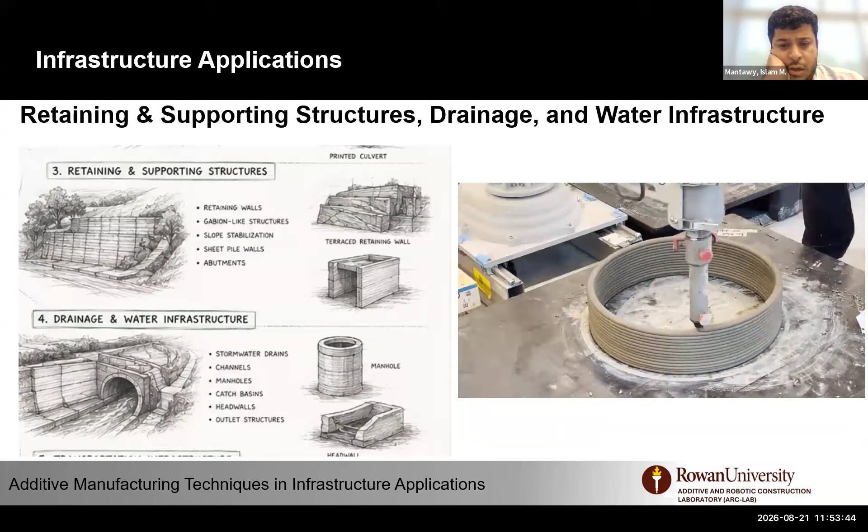For underwater printing, there are a lot of applications, including bridge caissons and others - retaining and supporting structures, drainage and water systems, we do a lot of work on culvert pipes. For coastal and marine infrastructure, I know UM has a lot of work in this area too for coastal restoration, and we can see how complicated geometry can be achieved with 3D printing.

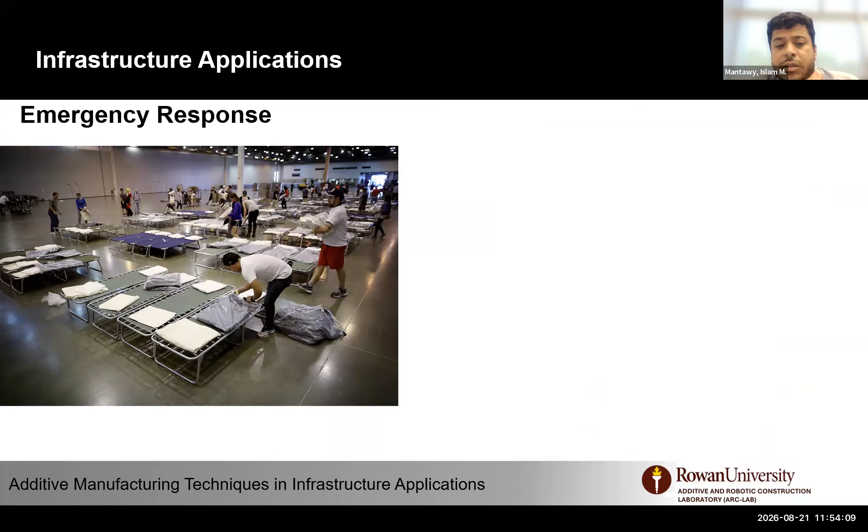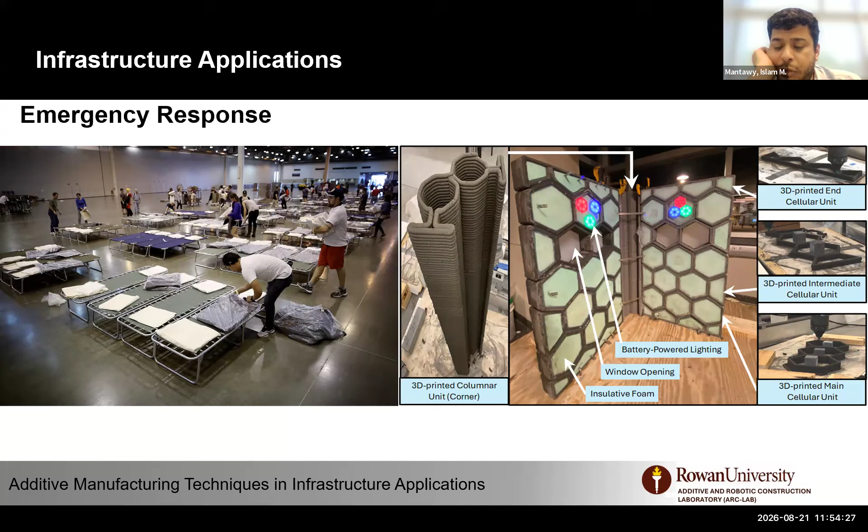One thing we're very interested in is emergency response - in case of need for social distancing and simultaneous evacuation that would create conflict. So we created a system that can be rapidly deployed using 3D printed components and other commercial material from Home Depot, that can be integrated into a wall system allowing two people to assemble a temporary shelter with necessary living support.